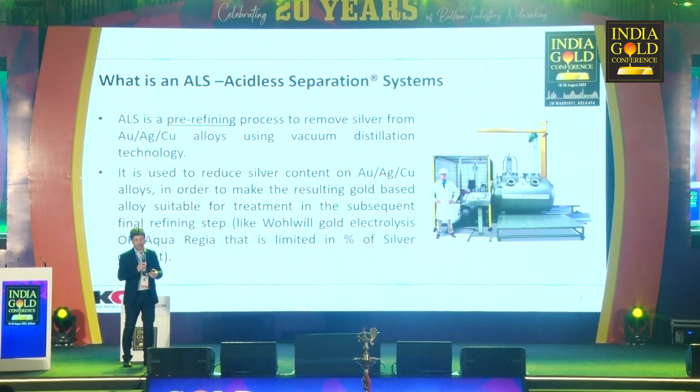The ALS, for those not familiar with the technology, is a pre-refining process based on vacuum distillation that is capable of separating mainly silver and volatile components from gold alloys, which would be doré bars coming from mines or any type of feedstock. It is a pre-refining process that can be used before the traditional process of aqua regia or electrolysis.

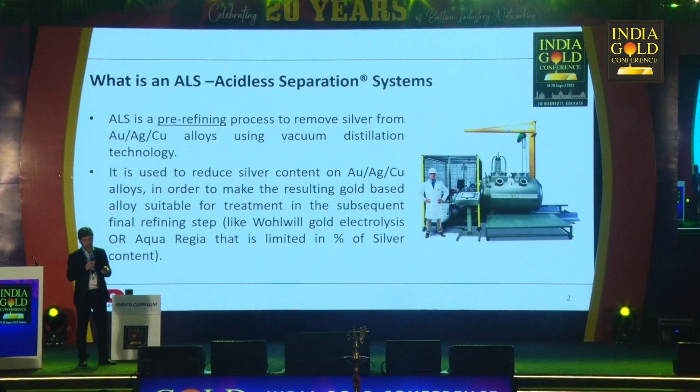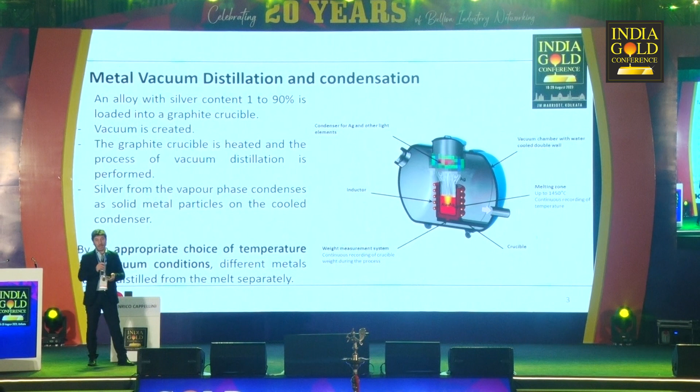The principle of the process, and generally speaking the principle of vacuum distillation, is to process the metal in metal form in a vacuum chamber, in a way in which we reach, under vacuum, a high temperature and start the evaporation of selected components.

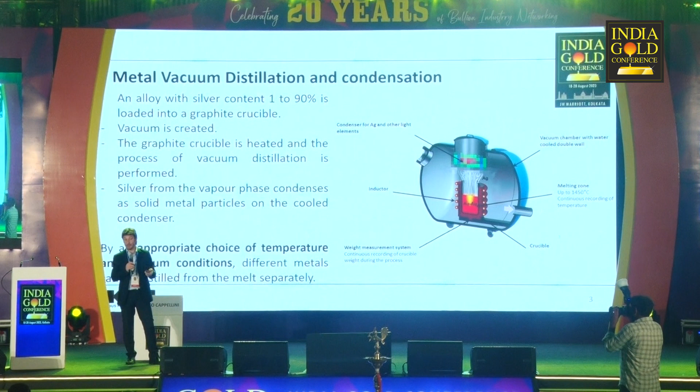Some part of the metal will evaporate during this process and will be condensed in metal form in a condenser that is on top of the crucible. So the process, as you may understand, does not involve any chemicals and does not produce any byproduct. This is why the process is called the acidless process.

The basic physical principle of vacuum distillation is based on the concept of vapor pressure. Each metal within an alloy has a different vapor pressure - we can say it has a different capability to evaporate depending on the condition. Using this principle, in which different metals evaporate at different conditions, we can separate and selectively evaporate only the metal that we want to separate.

Specifically, this is done in our industry mainly for silver and some other components like lead or zinc that can be impurities in our alloys.

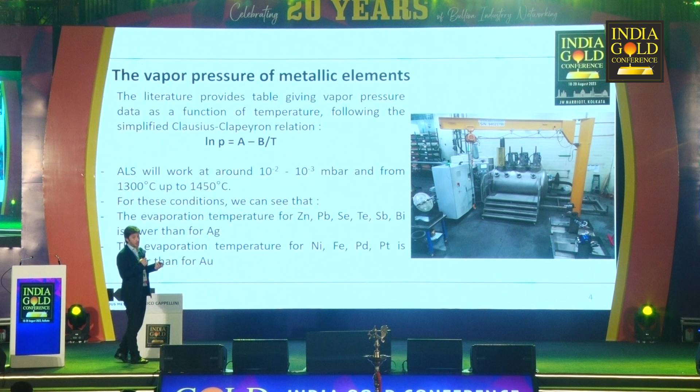Without going into the formulas that are in the presentation, this slide is just to explain a concept of metal distillation. Metal distillation is an excellent process, but it's not a process that can separate any kind of metal. There are some metals that can be evaporated, can be distilled, and some others that will not be distilled.

This is the principle that we use to separate silver and gold. The principle is that the vapor pressure has to be quite different between the metals we want to evaporate - there should be some distance in terms of curves in order to be selective in the evaporation.

The other formula, which I'm not going into detail on but is important to understand as a principle, is that the vacuum distillation and the ALS process is a very fast process. We can achieve separation of up to 500 grams per minute of silver during the process, which means that in 1 hour we can actually achieve separation of 30 kilos of silver in an alloy. It's one of the fastest refining processes in the industry.

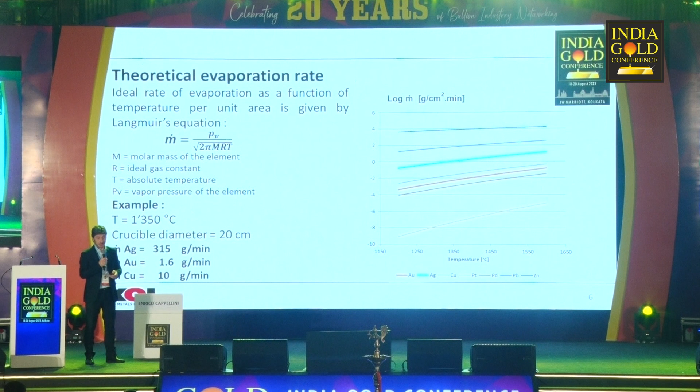There is no comparison with the aqua regia process, or even the Miller process or the electrolysis process. One of the most important characteristics of the ALS and vacuum distillation is that there are no chemicals and no byproducts, so by definition it's a very green and sustainable process.

It's a process in which we take only the material that we need to process inside our machine, and we obtain two metals at the end. From this point, we can move forward with the final refining.

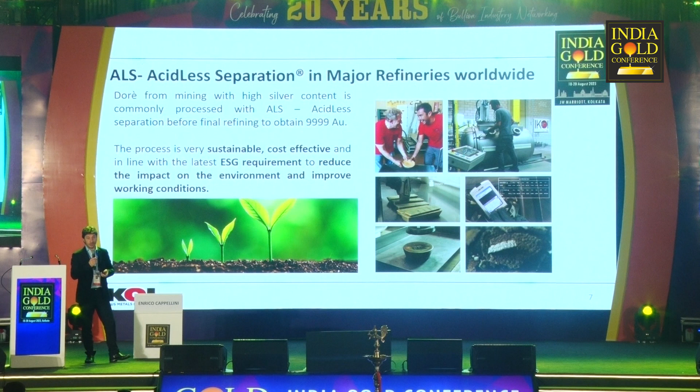This is one of the reasons why this technology is becoming more and more common in many refineries, especially the big refineries in which environmental issues are very important and foremost in any consideration. This is basically, very quickly, what the vacuum distillation technology is so far and what the ALS technology is so far.

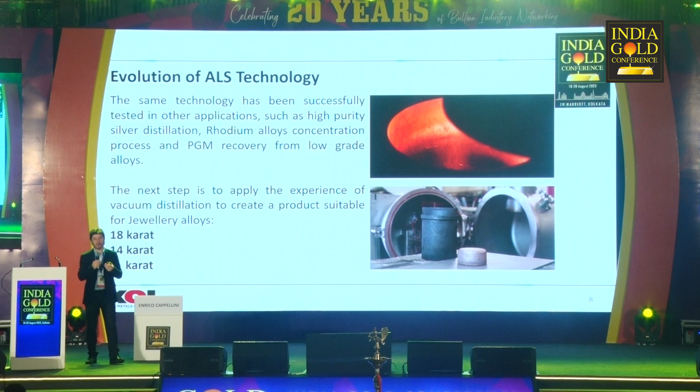Going forward, the technology evolved over the years, and today we are presenting for the first time an application of the same technology to a different kind of feedstock. Specifically in this conference, we are presenting the technology applied to the jewelry industry and carat gold. Mostly, the ALS and vacuum distillation technology has been used to process feedstock coming from mines worldwide with high silver content, but the capability of the process is also very powerful for carat gold and secondary gold alloys.

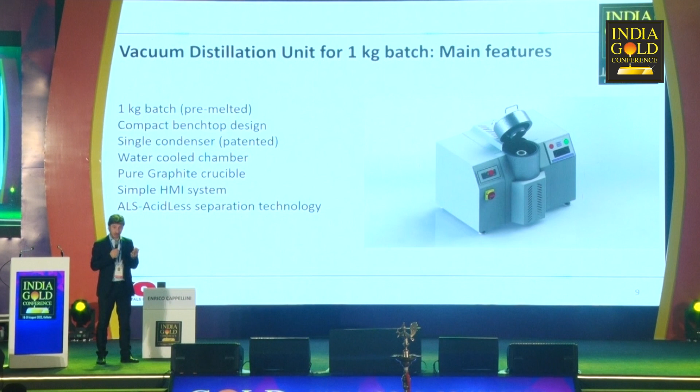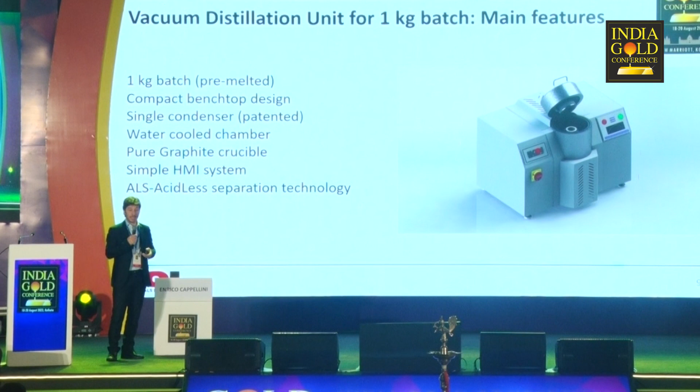And for this reason, one of the things that we introduce, presented for the first time, is a machine based on the vacuum principle technology, but a lot smaller in terms of batch size and a lot simpler in terms of operating and maintenance. It's a 1 kilo machine, which has all the main features of the other machines that we already produce, which go up to 200 kilos.

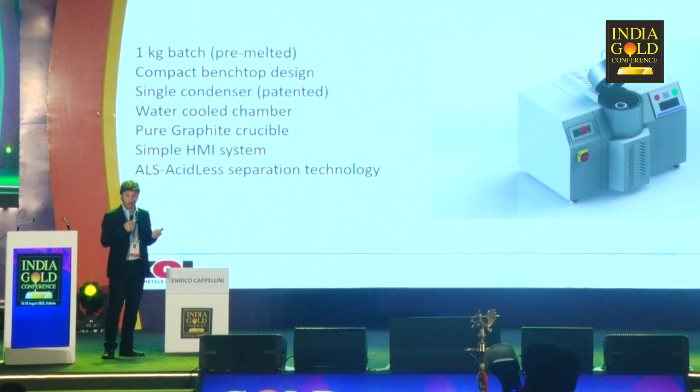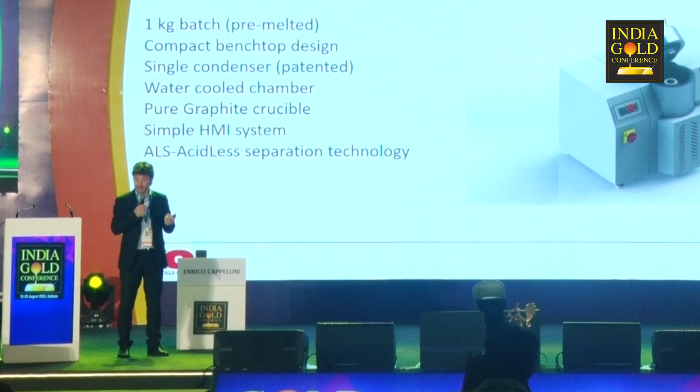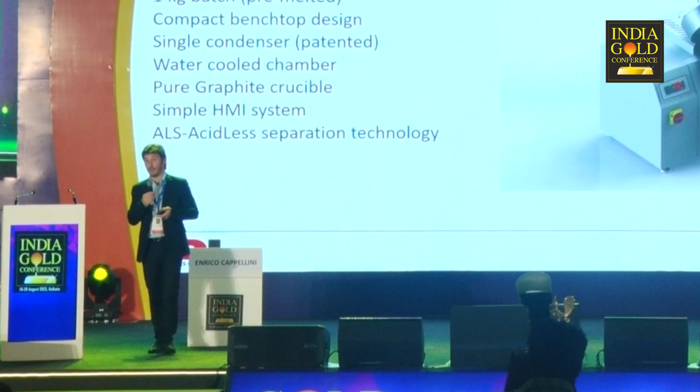And it's a benchtop machine that can be used by any jewelry maker or jewelry refiner that wants to process the scrap of their own production. To give you an example, a jewelry maker who is casting jewelry and has what is called the casting tree as scrap can process this material inside the machine very easily and quickly, in order to improve the refining of their own material, getting it back into the cycle to produce other jewelry products.

To give you a bit of an overview, this machine is designed to be very simple and very compact. It's a benchtop machine, about 800 millimeters wide and 600 millimeters tall, so it's very compact. It's a machine that can deliver a lot of benefit for refiners redoing work with jewelry scrap at 18 carats or 14 carats.

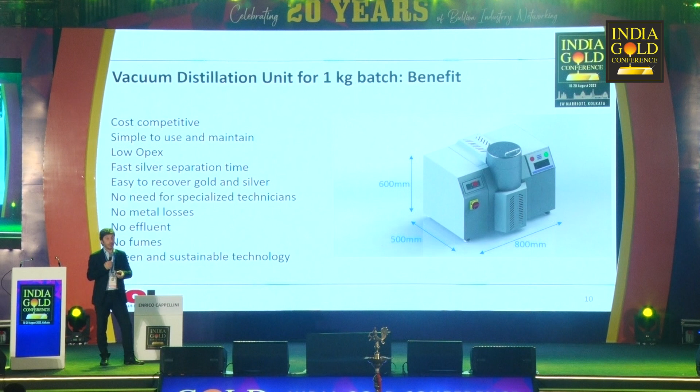First of all, this can lower the operating cost of these refining activities. It's also quite simple. It doesn't need specialized technology or specialized technicians to run it, nor a chemical background or knowledge of chemistry. It's quite simple to operate, almost by anybody. It's really a machine designed to be operated by any small operation that can benefit from it.

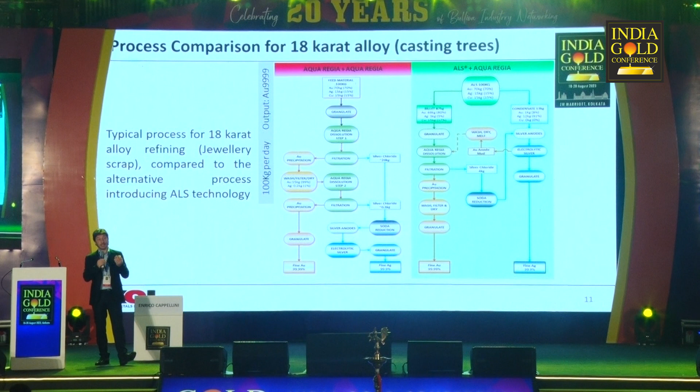To give you an idea of the possible benefit of introducing this technology into the refining of karat gold, on the screen you see two different processes. Details will be available—I don't expect anybody to read them now—but it's basically a comparison of a classical aqua regia process applied to a jewelry alloy versus the possibility of introducing the ALS into this process.

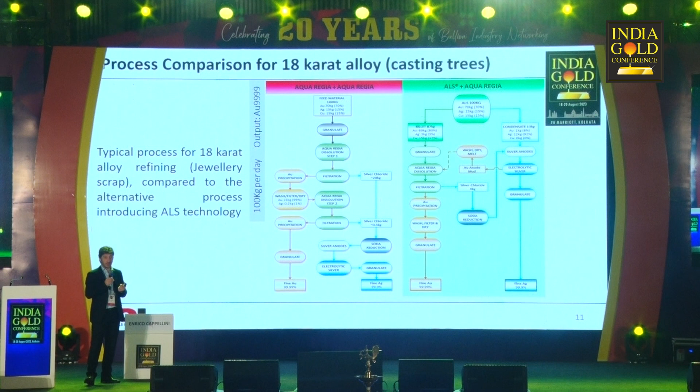The advantages are multiple, starting from fast recovery and going into the possibility to eradicate most of the effluent and byproducts that we produce using aqua regia. This will lead to a better recovery of the gold contained in the alloy.

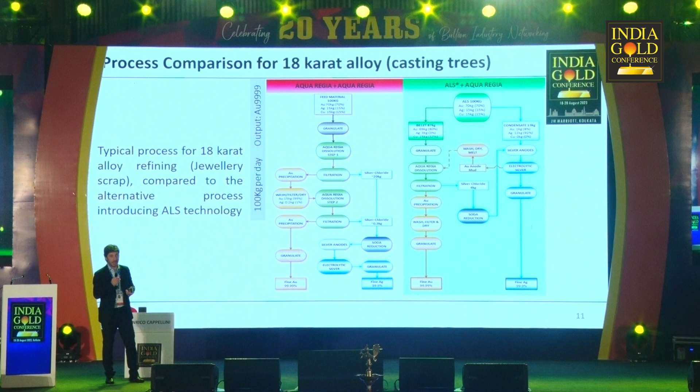To summarize, the capability we have with this machine, and the benefit we can give using this technology generally speaking, and this machine specifically for the jewelry industry, is to have lower gold inventory, because the gold is available a lot faster, to have very low operating expenses, low or negligible gold loss during the process since the gold will not go into any byproduct or effluent, to have less cost to recover the silver from the alloy, and better metal control.

This is a machine that works very efficiently on the batch. Everything processed within the machine stays in the machine—it doesn't go outside as fumes or liquid—and it's very easy to recollect all the metal processed within it. It's also a very easy and friendly type of machine that can be operated without deep knowledge of processing or chemistry.

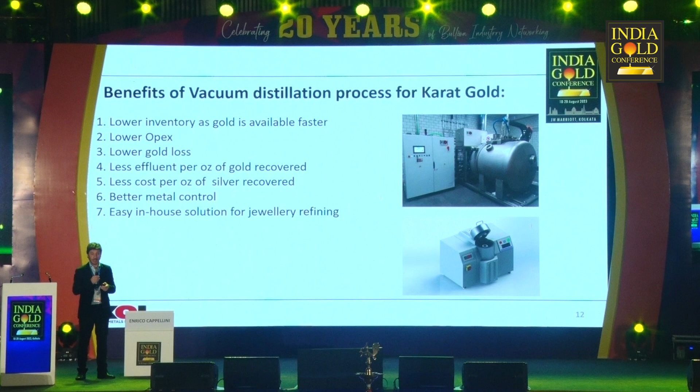So we think that this would be the first and the best place to introduce this machine, which is an evolution of the technology that we already apply to many other refineries. This conference was actually probably the best place in our mind to present this for the first time, and to give some preliminary information about it, and to provide information also at our stand for anybody who is interested.

This is my quick and brief presentation, but if you have questions or if you want to know more, I'm here for the next few minutes. Hello, good afternoon.

You said there are little losses. What is the quantum of losses in this refining process? You said there is very little silver loss, very little gold loss. So what are the losses as compared to the aqua regia process?

Look, we have experience on the metal losses of this process. They are in the order of 0.001% of the metal that is put as feedstock. This is an empirical measurement, but it also comes quite easily to understanding the process. The process is inside a vacuum-sealed chamber, and everything happens inside with no fumes and no liquid going outside the chamber. So once the process is finished and the chamber is clean, all the metal is recovered.

If there's an alloy which contains more silver and less gold, what will be the purity of silver and gold recovered by this process? It depends on the feedstock that we put in. The purity of silver is usually up to 98, 99%, depending on how you run the process. The purity of gold depends on the other base elements that you have in your alloy.

I'll give you a simple example. It is quite easy to separate silver from a karat gold alloy, but it will not be possible to separate copper from the gold. So you will have in your separation silver that is almost pure, but copper that will remain with the gold.